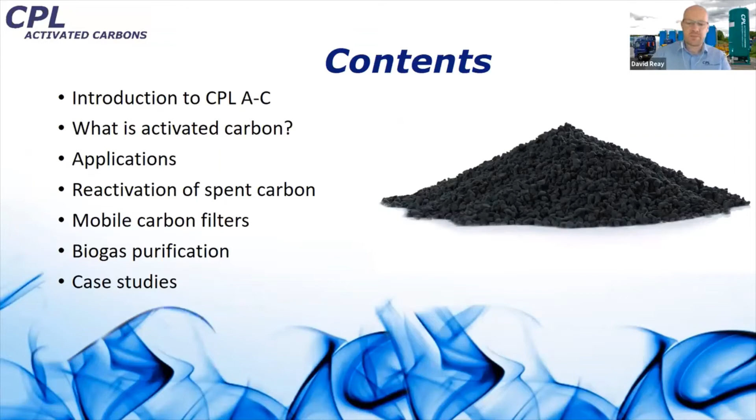Then I'll talk a bit more specifically about biogas purification, so the selection of the correct carbons for your particular problem, and I'll try and elaborate with some case studies. So a little bit about my company, CPL Activated Carbons. We've been around for 30 years. We're a UK-based supplier of carbon products, but in addition to that, we also manufacture a number of our specialised grades, our impregnated carbons, here in the UK. I'll talk a little bit about impregs later, what they do, what that means.

Carbon's been around a long time, but it is a very technical business. So we have full R&D and QA lab support at our reactivation facility, so we can help customers with a particular issue if that's required. And as you would imagine, we have the latest environmental and quality accreditations. This idea of a full carbon service, so carbon vessels and reactivation, really depends on vessel service centres and waste transfer centres. We have those in the UK and in France, plus we have the capability to operate in Spain.

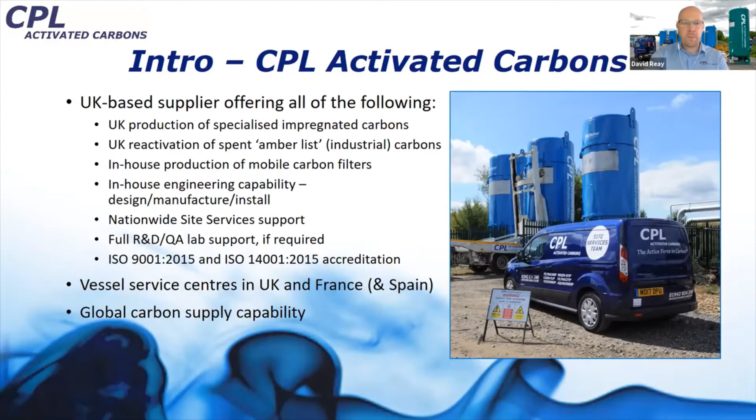So what is activated carbon? Most of you, well, hopefully many of you will have heard of it. Basically, it's a very pure form of charcoal with a very high surface area. People typically say a teaspoon of activated carbon has a surface area of a football pitch. That gives you some indication of the surface area we're talking about.

Raw materials are typically carbonaceous raw materials like bituminous coal, coconut shell, wood, and increasingly other types of biomass. Each of those raw materials gives a carbon with a different set of properties, and it's the job of the activated carbon supplier to help a customer choose the correct product for their particular purification situation.

It comes in various physical forms. Granular, so as the name implies, granular activated carbon, referred to as GAC. Powdered carbon, not used in biogas, but it's used in other applications. And extruded pellets, which again are typically used in gas phase applications like biogas.

So that allows us to reactivate or recycle the carbon by putting it into a kiln at around 800, 900 degrees C. So that allows us to regenerate the carbon. And the impurities are desorbed. They're basically destroyed from the surface, leaving a clean carbon, which can be used again and again. So it obviously offers environmental benefits and economic benefits.

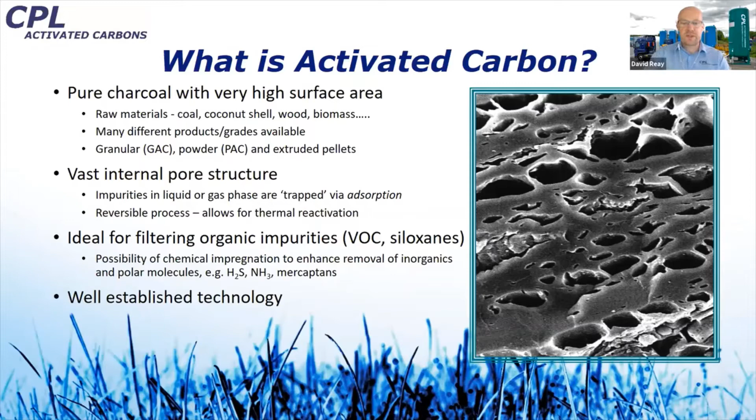Water treatment could be anything from drinking water, so when you turn a tap on, that drinking water has come through a carbon filter at some stage. It could be an industrial process water or some sort of wastewater or remediation type project. Biogas, so what we're interested in here today, and biomethane, of course, is an important and growing application for carbon.

Flue gas, so this is your non-recyclable municipal waste. It's usually incinerated to recover the energy content. Carbon is used in the flue gas scrubber to take out mercury and dioxins and other impurities. It's used widely in the food industry as well. Sugar purification, edible oil, many other food applications, beverage purification as well, alcohol.

And as I mentioned briefly before, it's used widely in the gold industry to recover gold and other precious metals, plus many others. But I just wanted to give you a flavour for the types of industries that we supply. And there's many crossovers. For example, a biogas plant might have an odour control facility, and a landfill site might have a leachate on the liquid side. So many crossovers, and we train our guys to go in and ask the right questions and work out where the carbon is needed.

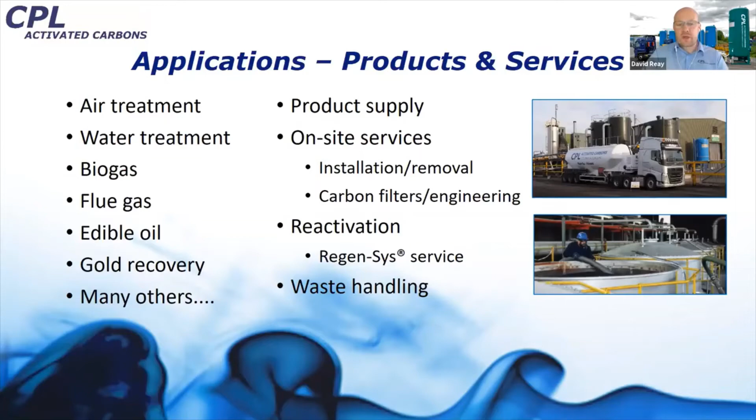And if you look at our website or our YouTube channel, you can find out more about what the Regen-Sys service looks like. Occasionally, carbon cannot be recycled, so we will assist customers, advising them on waste handling and disposal. But as I say, wherever possible, carbon is always recycled. Just a brief slide on reactivation.

So we have a large manufacturing capability here in the UK, again with QA and R&D labs. We have two completely separate spent carbon reactivation units. The big one is our 8,000 ton Amber list reactivation site. That's for industrial applications like biogas. You can see that's on the top right-hand side, and that's the big beast. That's in fact one of the biggest Amber reactivation facilities in the whole of Europe. We opened that just a couple of years ago.

And in a totally separate building, we have what we call green list reactivation. So that's from drinking water and food. So as you can imagine, you need to keep those two streams completely separate. So we work with UK water companies recycling their activated carbon that's used for drinking water.

So there are many advantages of recycling your carbon, both economic and environmental. Principally, carbon footprint. We've calculated the footprint saving of using recycled carbon rather than a brand new or virgin carbon is more than 90%. That's of huge significance. There's no need for waste disposal or incineration because the carbon is reused again and again.

And also it protects you from the carbon price fluctuations. So virgin carbon goes up and down. In fact, two global carbon companies have just this month announced large price increases on their virgin carbon. So by recycling the carbon you already have, that protects you a bit from those fluctuations.

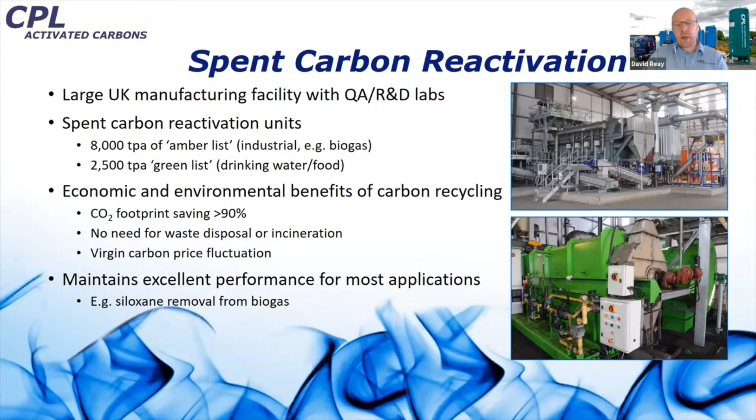But what about its performance? Well, for most applications, recycled carbon maintains excellent performance. And that's particularly true for siloxane removal from biogas, which I hope will be of interest to a number of you today.

That was designed specifically for the biogas industry, notably landfill biogas, but also used for biomethane sites as well. We have a reasonably high flow of quite heavily contaminated gas. So you need a deep bed filter of that size to give you the protection you require. We have vessels for liquid phase and for gas phase. So again, it could be wastewater, it could be leachate. On the gas phase, it could be odor control or biogas filtration.

And we have some special versions available called high flow units. I'll show you briefly on the next slide. Not really used for biogas per se, but if you have a high flow odor control situation or a very high flow VOC contamination, you might want a high flow type filter.

Yeah, so I mentioned high flow units. So you can imagine a waste transfer station where they have to change the entire air volume in the building 3 times an hour. So it's very, very low contamination level, but very high volume. So we have these high flow units. Our flagship unit there is called the HF24, and contains 24 cubic meters of carbon. It stands on a 30-foot container, so it's about 10 meters.

It has twin carbon chambers that go down the entire length. So it ensures an even flow distribution of the gas through the carbon, but with minimal pressure drop. And that unit there can cope with flows of up to 45,000 cubes an hour. That's a very high flow. Again, it's typical for waste transfer stations. But on the biogas filters, it tends to be up to, say, 5 or 5,500 cubes an hour.

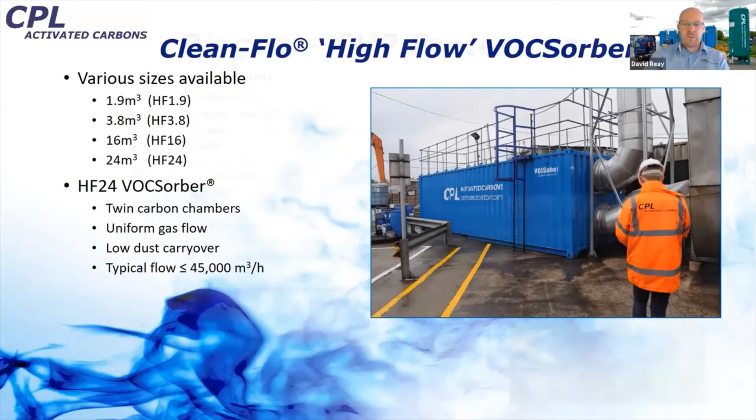So, going into more detail, I'll explain what we supply to the industry. So, what is CHP protection with carbon? Well, you need to remove impurities. So you're trying to protect the CHP or upgrade the biomethane. Broadly speaking, there are two types of compounds. You have your organic compounds, also known as VOCs, volatile organic compounds.

Typically, these are things like siloxanes, which you find in municipal waste in landfills, and also in municipal waste in wastewater treatment plants. Pinenes, that's a compound you find in domestic cleaning products, limonene from citrus fruits and that type of thing. All these things are VOCs that you'll want to remove from the biogas. Siloxanes in particular are a problem in the biogas industry.

It deposits silica on hot surfaces. So basically inside your engine, it coats the engine with glass effectively, which can cause enormous damage and be very costly to replace or maintain. So by having a carbon filter up front, you can protect your assets in that way. So for these organic compounds, we generally recommend a standard carbon, a non-impregnated carbon.

And these typically are either the pellets, the 4mm pellets are best known, or increasingly large granular. And on the right-hand side, you can see a picture of both types. In the foreground, you have a large granular grade, and in the back, you have a more traditional pellet. There's no difference in performance from either, but the large granular tends to be a little bit cheaper because you don't have to process it into a pellet. So that's becoming increasingly common in gas phase applications.

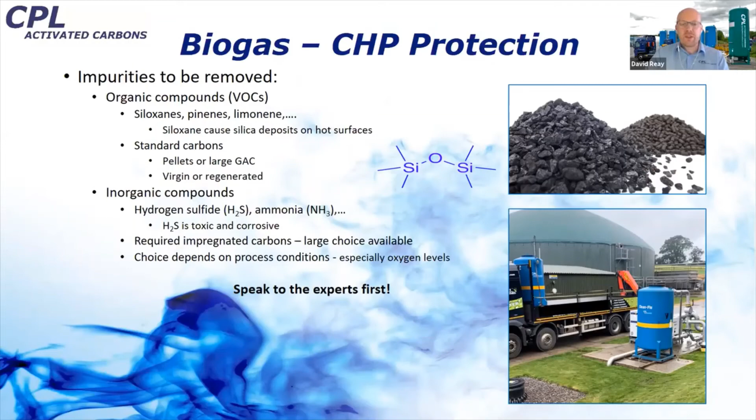But the message is, please come and speak to us, speak to another carbon company, speak to the experts. We will help you analyse your gas, work out what the best solution is in terms of carbon selection, and give you the best performance and economy.

So we'll start with one quick case study to answer the question, why use carbon at all to protect your engines? Well, our largest vessel, this 30 cube vessel, which is the largest vessel on the market currently, was the very first vessel we developed and was delivered to a landfill gas site in Scotland. This site previously had no engine protection at all, and they were changing their engine oil every 150 hours. So you can imagine the inconvenience and the cost of doing that.

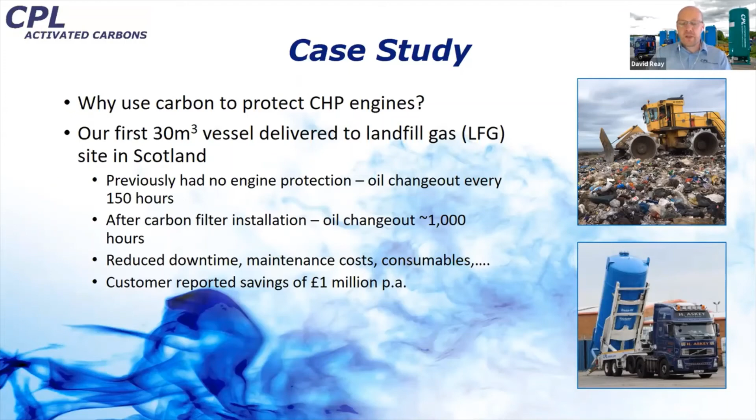After we installed our 30 cube vessel, change out increased to every 1,000 hours. So obviously that gave them reduced downtime, reduced maintenance cost, reduced consumables in terms of oil. And the customer told us on that one site alone, it saved them £1 million a year. So a huge saving that is achievable just by adding one of our single filters.

Just a little bit more detail on our engineering before I talk about some more case studies. So in addition to the vessels, we can also supply all the pipework, the connections, etc. And we have an in-house design capability to do that. And it only adds typically 2 weeks to the lead time to a project. Essentially, we want to be the one-stop shop for carbon filtration for the full service. If you need carbon on your site, you can come to us and we will engineer the solution to it.

An example is a wastewater treatment plant in central England. It did have a siloxane filter, but it was very, very small, less than 2 meter cube. That's actually smaller than our smallest mobile filter. So real tiny little thing, wasn't spec'd at all for the job. So they decided to go right up to our biggest filter, our 30 cube filter from day one.

And future-proofing, so we can install pipework for multiple filters, even if a single filter is installed initially. So again, if a site wants to try a filter, but may need more in the future, if you engineer that right from day one, then it saves you time, effort, and cost further down the stream.

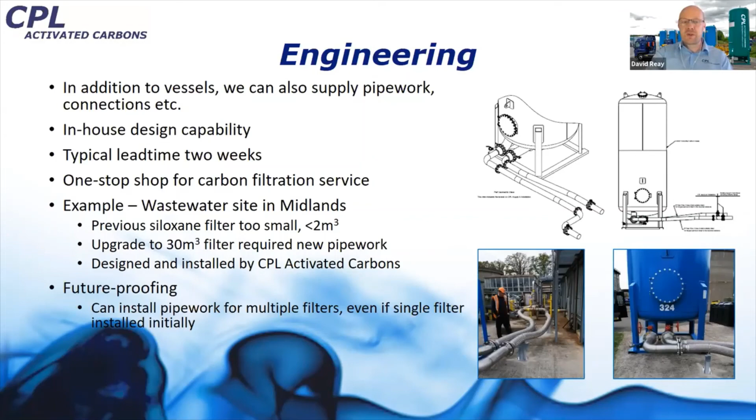So a second case study, this is a biomethane site in the south of England. So again, I call this not enough carbon. So the main issue at this site was hydrogen sulfide. It had a little bit of VOC, but mainly H2S was the problem. They do have two small 6 cube fixed carbon filters installed by the original equipment manufacturer, but it was soon discovered that wasn't sufficient to cope with the H2S levels in their gas. They were changing their carbon out every 3 to 4 weeks, and that required downtime and cost, obviously.

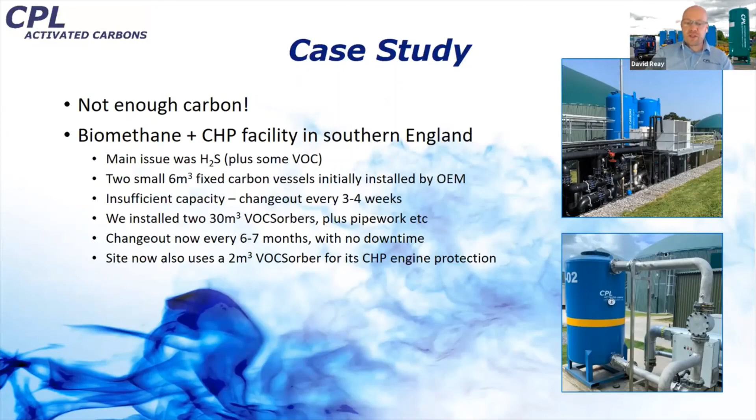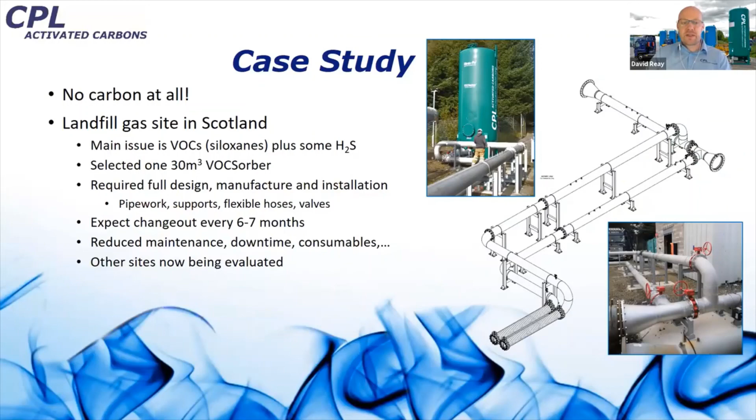And now they expect to change out every 6 to 7 months. It's only just gone in the last 2 weeks, but that's the expectation. And again, reduced maintenance, downtime and consumables. And we're now looking at other sites for this customer too.

So to summarise. Oh, sorry. Perfect. Yeah, I just wanted to ask. Yeah, that's it. Coming to the end now.

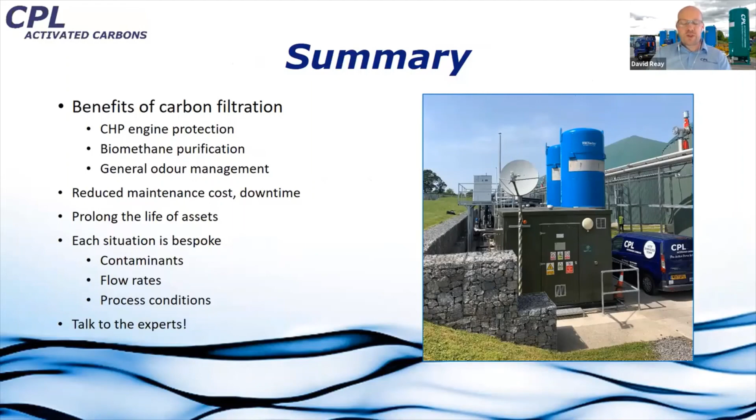So I hope that was interesting. Just a very quick run through.